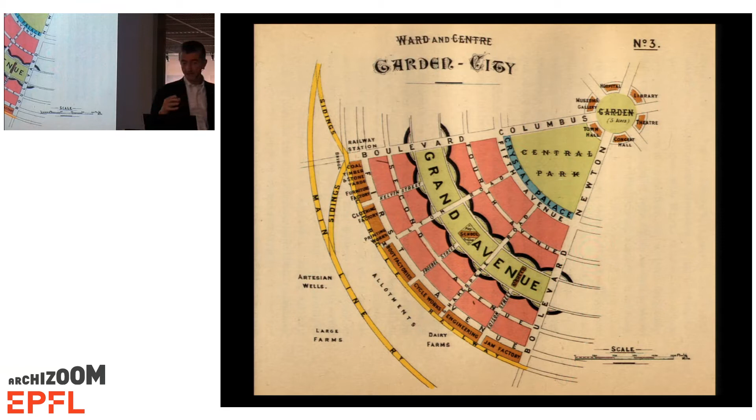The first model for this expansion of the city in the 19th century—one of the first models, there are others of course—is Ebenezer Howard with his garden city, who developed the idea of a cellular growth of a city, a new strategy of urbanization that would take the place of the historical city, which was dirty, non-social, oppressing, and obsolete, and would start a new way of life in the country. You remember the three magnets: town, country, and town-country.

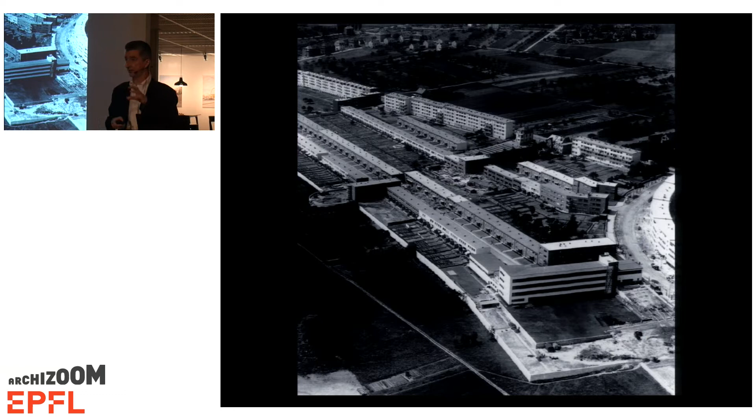From this point on, city extensions happened in such a way. This is an example from Germany, the Römerstadt by Ernst May. These Siedlungen of the 20s took some ideas from the garden city movement. It's quite different because these are not independent cities—they are somehow attached to a central city, in this case Frankfurt. But it's still the idea of having a lot of green and distributing buildings in the green area.

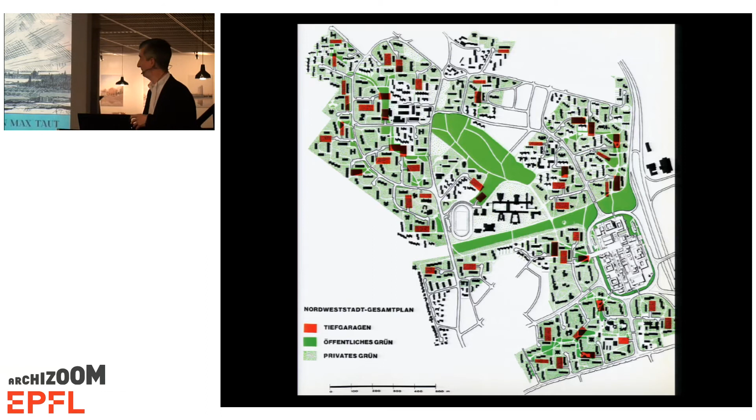This was enhanced, especially in Germany but not only there, after the Second World War by the destruction, which was in fact partially accepted in good spirit because it was called a kind of mechanical opening up—the German wording is even nicer, mechanische Auflockerung. So something that got rid of the overdensity of the 19th century city, and in the ruins or near the ruins of that city, new rural cities could grow, and they then mutated.

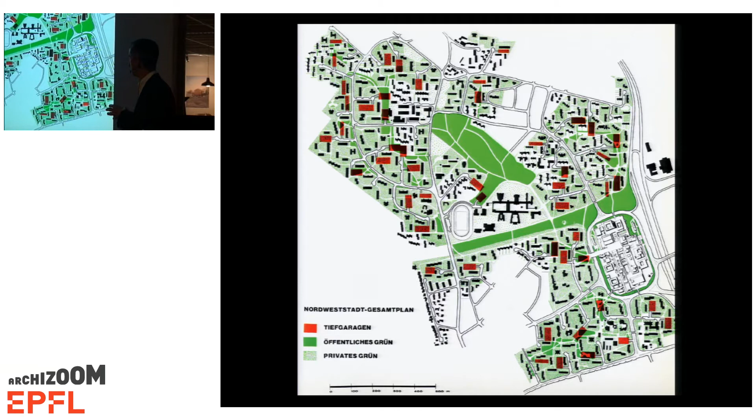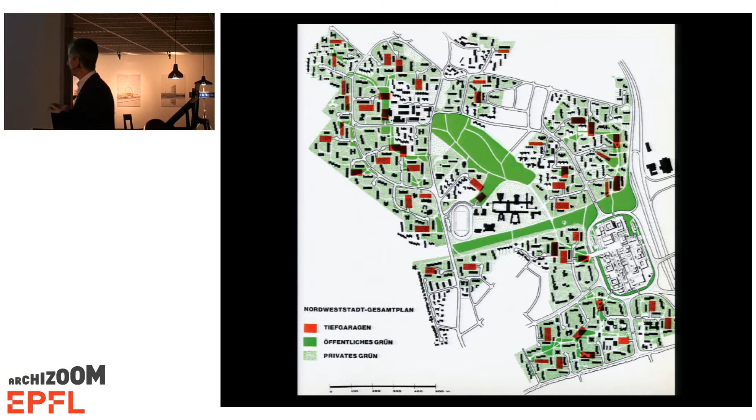I would like to tell you, to sketch another history of modern city extension, starting from almost the same period.

In the 19th century, an engineer named Ildefonso Cerdà first started to do a survey of the city of Barcelona, and then developed this city extension plan. Here you have the old core of Barcelona, and this is his extension plan, a very huge plan for a lot of people, that completely changes the structure of the city and also the type of dwelling.

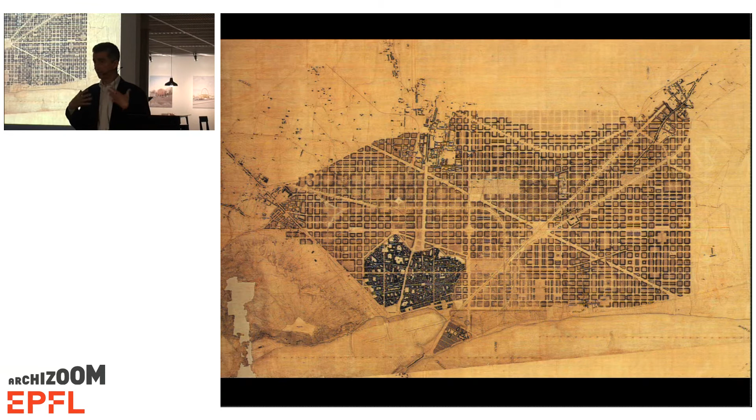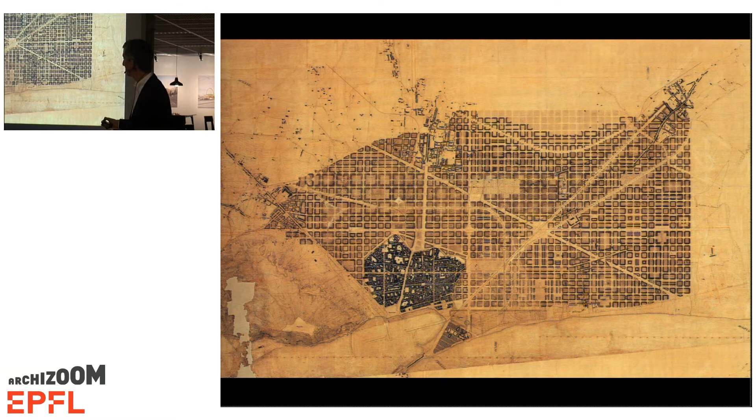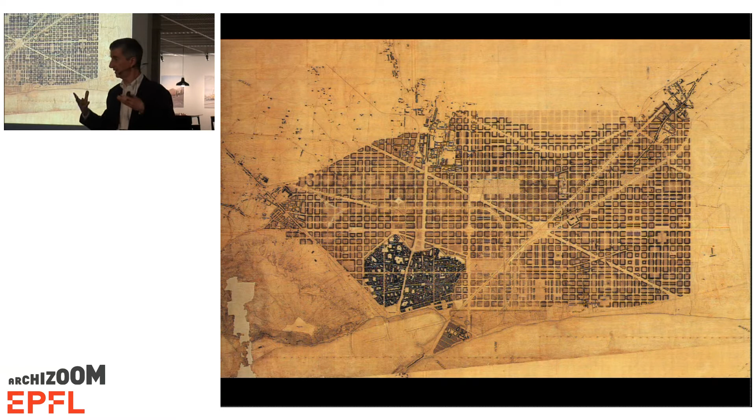And this was an expansion done for exactly the same reasons as Howard's Garden City strategy - to house a lot of new dwellers, and to house them in such a way that they could escape the very tight, dark, unhealthy historical city.

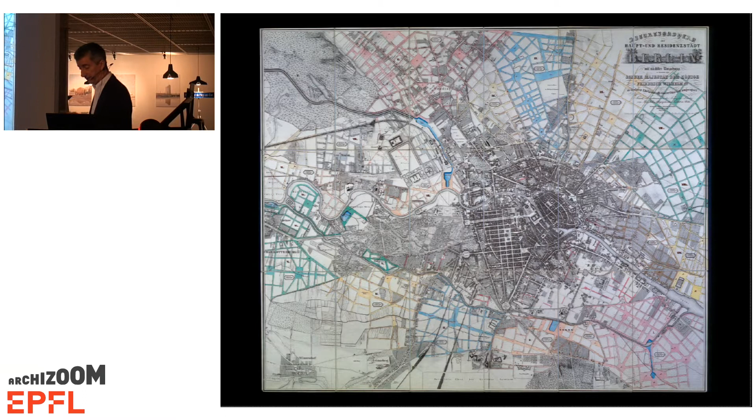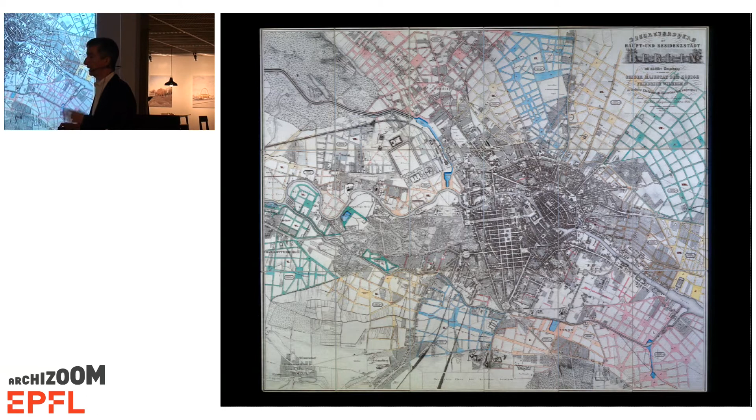Or the plan that James Hobrecht drew up for Berlin, a plan that has been very much criticized. In my view, it's quite an interesting plan, because this was in the middle of the 19th century. This was the built substance of Berlin - it had a little less than 1 million people, and his plan was meant for about 4 million people. So it was a real important extension.

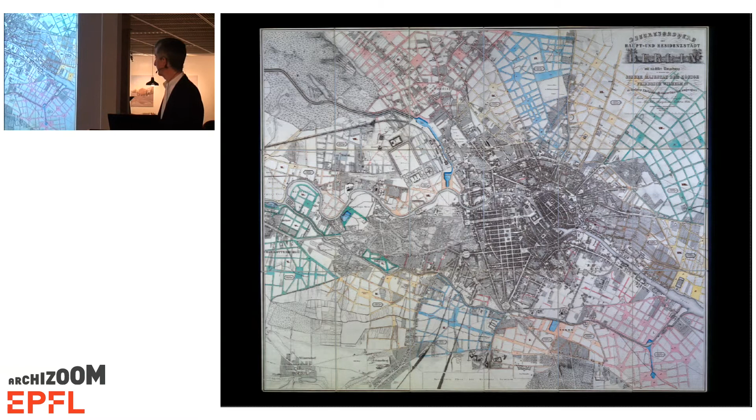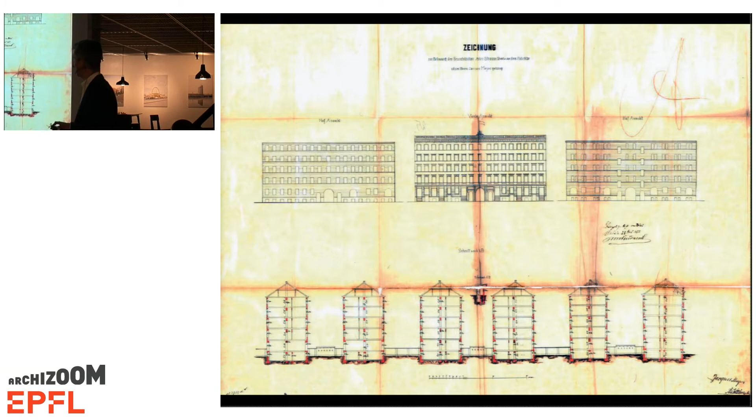He drew up this plan. He has become notoriously famous, or Berlin has become notoriously famous, for the very dense construction with the so-called Mietskasernen, the blocks. This is the most terrifying example that one can find - it's Meyerhof of the 1870s, the 19th century. A quite grim structure of one building after the other, one in the back of the street, with very small courtyards, very poor housing conditions.

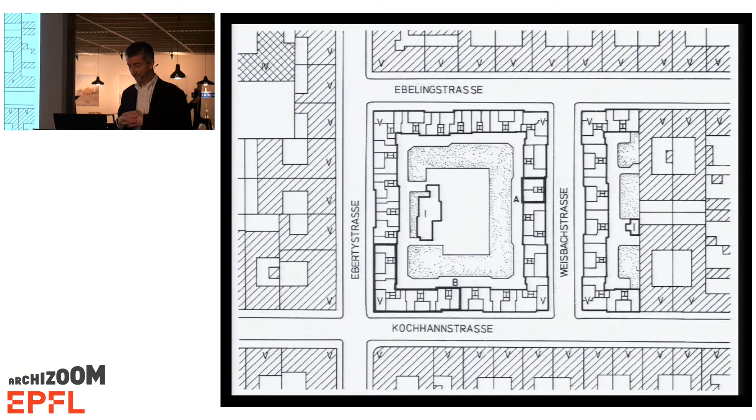But it's not the only way to go about a dense city expansion. Approximately at the same time, Alfred Messel built his block on the Weisbachstraße, which is called a reformed block - that is a block with an open courtyard. The courtyard looked like this, so it was a nice place where children played, as you can see.

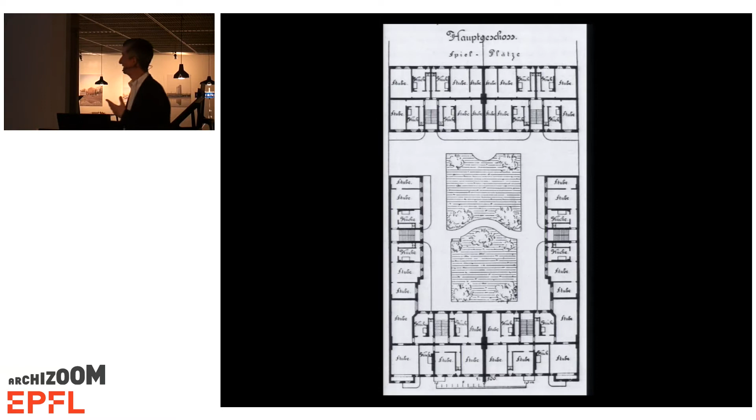And the later blocks that he did, still in Berlin in the 1890s, show a more open structure, very clear design, and quite attractive inner worlds that can also be connected to each other. This is Riehmers Hofgarten, still in Berlin. I show it only to show you the different modulation of this dense city expansion. The question is, which model should we pursue?

And also to understand a little bit more about these two histories and these two models, we have to go back to the main idea of suburbia, or the main idea of the garden city, which has been explained probably in the best book, by a colleague of ours, Robert Bruegmann, who's written a book on suburbia. He comes to a completely different conclusion than I do, but he explains very clearly how, in a way, the idea of suburbia was to have a castle with a park, and once you have a mass society, and once you have also a democratic society, of course you cannot - it's not anymore for just a few people, but it's for a mass society.

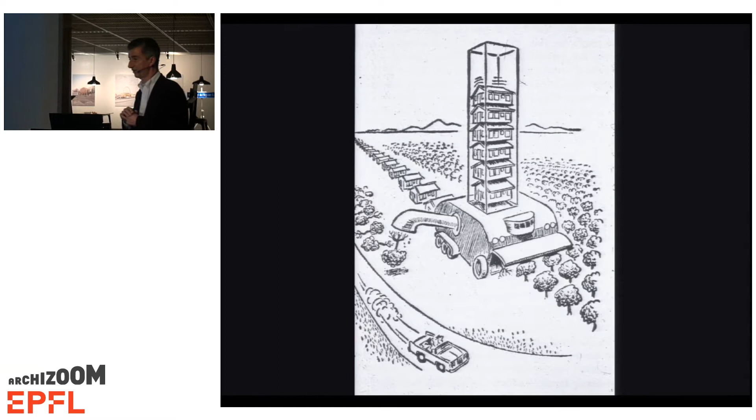This is a cartoon - an interesting cartoon. Well, first of all, I think it's quite witty, but it's a cartoon from the 1940s. It's called 'The Mass Builder Strikes Again,' and obviously it shows the destruction of the landscape by this machine that is eating trees and spitting out houses. The interesting thing is who is using this, because I didn't discover it myself - I rediscovered it, because the man who used it in one of his books is Victor Grün.

We have the name in common, but not much more. Victor Grün was an Austrian immigrant to the United States, and he can, in a way, be defined as the inventor of the shopping mall. And Grün first accepted completely...

He has a really interesting theoretical evolution. First, he completely accepted suburbia, the new developments in the United States, and said the only problem they have is they need a kind of center, and the center is a shopping mall. He invented, in a way, shopping malls that are not only shopping malls, but where you also have other activities.

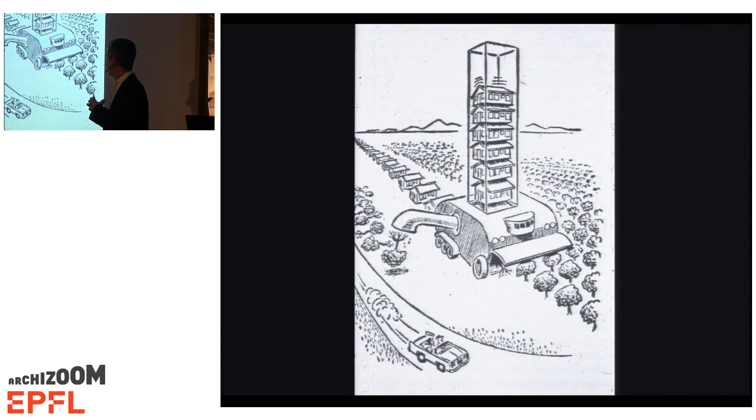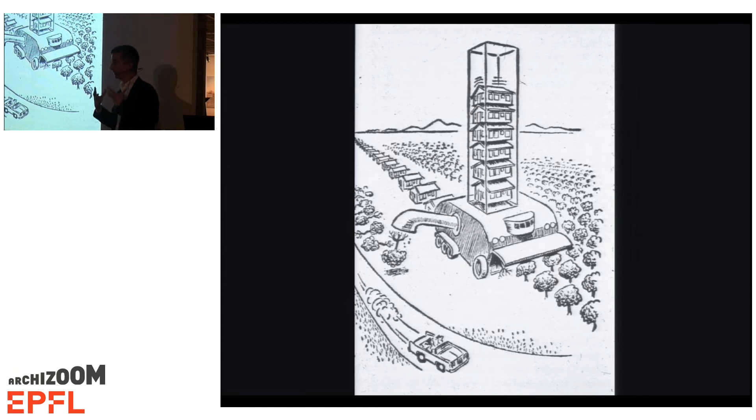You have childcare, a movie theater, and so on. After being extremely successful with these shopping malls, he decided, or understood, or thought that this was a bad development. He then wrote an important article, 'The Sad Story of the Shopping Mall,' and in one of his books where he tries to explain the development of suburbia, he uses this cartoon, which I happily reuse.

These images are not so bad after all, and they are quite attractive. We know a lot of artists and movie people who have used the fascination of these places, starting, on the architectural side, with Robert Venturi.

But we also have to ask ourselves: is this a solution that works for a big population? Is this a solution that is a strategy? Is it a good strategy for the development of a city?

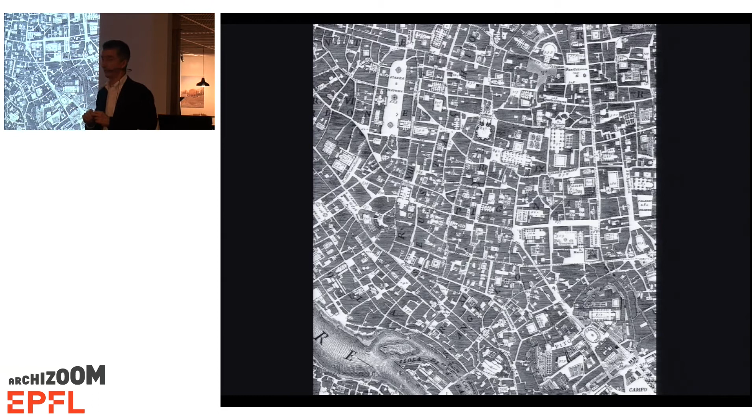And I suspect this can still be—not I suspect, I'm convinced—that this is still a model that, of course, we cannot reproduce, we cannot imitate. It also has a lot of drawbacks: some streets are very narrow, some houses are very high, some places are very dark.

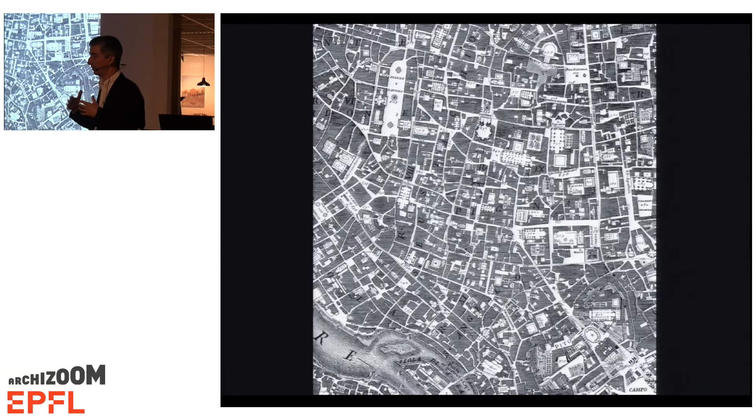But it is, in a way, the basis, or can be the basis, of a future city development. Or, to put it a little more polemically, I think this is a much more progressive city than the periphery images that we've just seen.

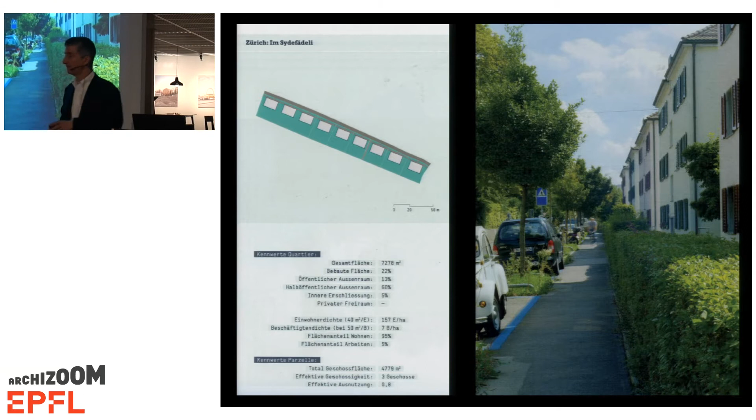We were curious to understand what density is. We were interested in density, but we were curious to understand what density really is. So we looked, this was done with my chair in Zurich, at some typical urban typologies or urban conditions from Swiss cities.

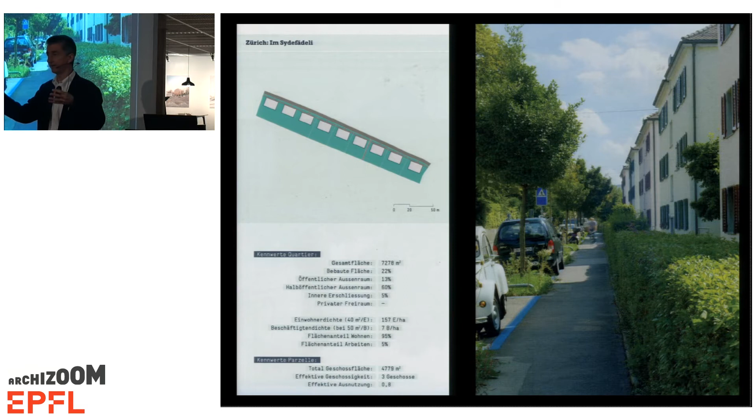We looked at how they are, basically, did a photograph—this is a plan—and we always noted what the density was. I'm talking only about the density of people living there, the residential density. There are many other densities, of course, contacts, workspace, and so on, but this is just to make it simple and comparable. It was just a matter of looking at the density of the residents.

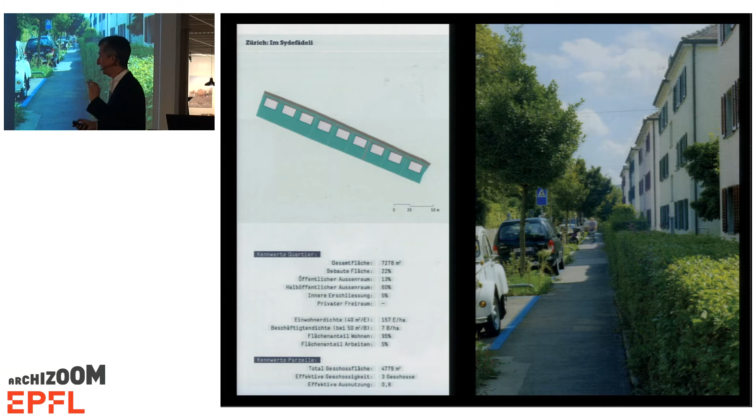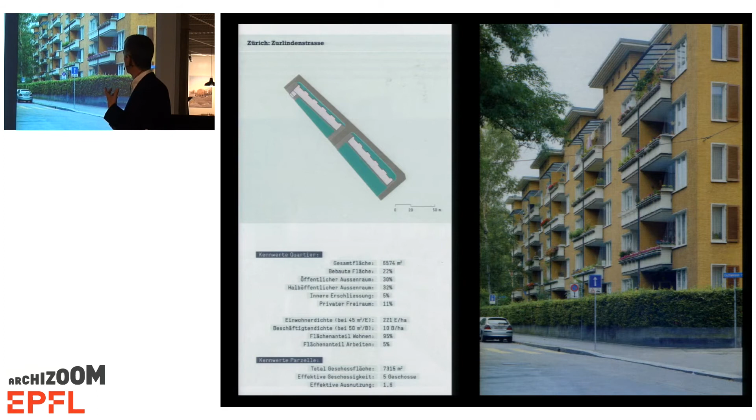And you can see these figures here. This is around 150. It was just to get an idea: this is a little bit more, this is 200, this is a slab.

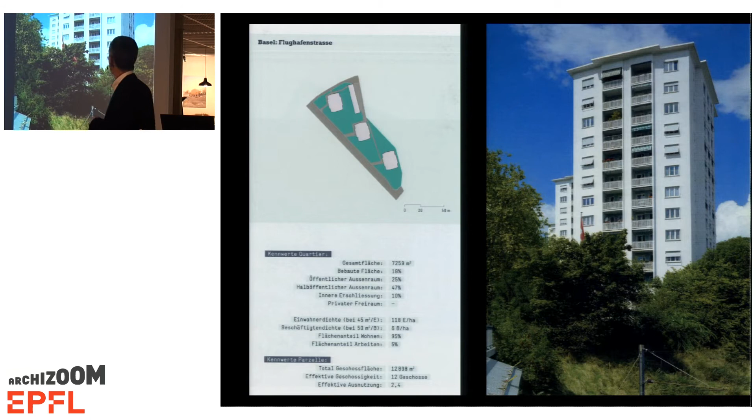This is a new, more modern development. It reaches 280. These are towers in Basel that are not very high, but especially they have big spaces between each other, so they are lower, 118.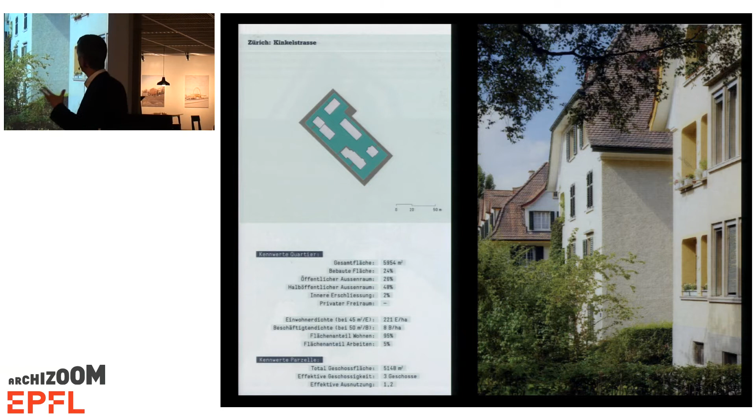This is a nice environment in Zurich with single standing houses with several apartments in one house. It's about 200. This is about the same, a little bit more than 200. This goes higher, 260, a block in Zurich, but rather low houses.

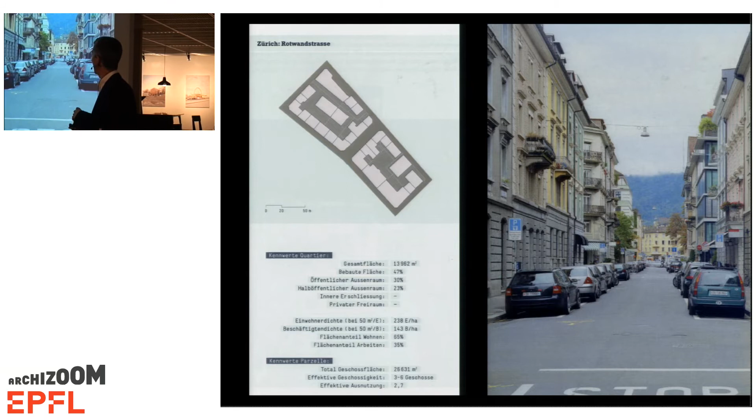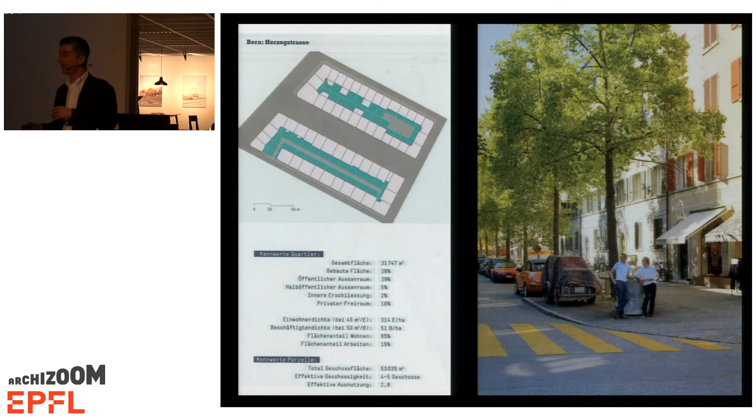This is a block with higher houses. It comes to 230. This is again a block, a little bit denser. It comes to 314. It was just for us a way to understand what density is about.

How, what can you reach with different typologies, and of course what kind of qualities you attain on the streets, in the courtyards, around the houses. It was, I must say, quite surprising, because there were some quarters like this one that did not give us an idea of density, of being oppressive, where we found out that quite a number of people were able to live in this space.

Why this interest in density? To make it short, there's a few issues why I think density is something we cannot avoid. Putting houses together, putting people together, enhances communication, and it's also good for a mixture of function, when you don't have only residential but also workspaces and jobs.

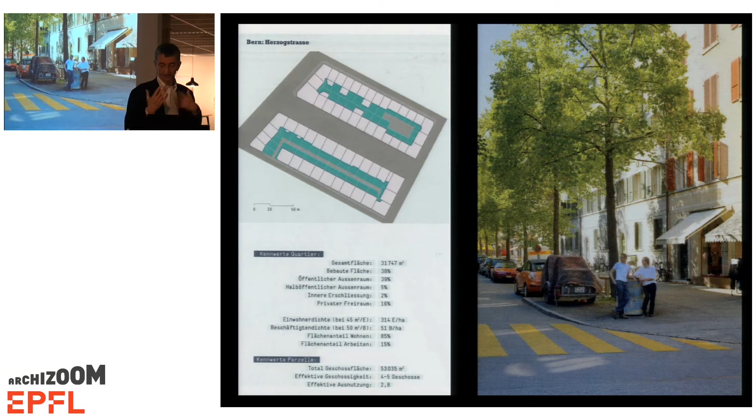And then I think what is really very important is the ecological issue. I think we just cannot afford to consume so much landscape as we still are consuming. Switzerland is a very positive example, but this terrifying figure of 1 square meter per second is what we are consuming in Switzerland in terms of landscape, and I think it's quite unacceptable. So these are, again very briefly—maybe we can discuss it more afterwards—why we have such an interest in density. There are also cultural aspects, but we will talk about that maybe later.

And finally, I would like to show you one intervention that we did in the periphery, where we tried to show that it's possible to build a dense city also in the periphery.

To make it clear, we also did this analysis of different situations because we do not believe there is one dense typology of a dense city. We don't believe it's row houses or blocks or so on. We think there is a big range of possibilities, and in fact we think that the history of the city offers a big choice, or big set of inspiration, of how to find different solutions to this question.

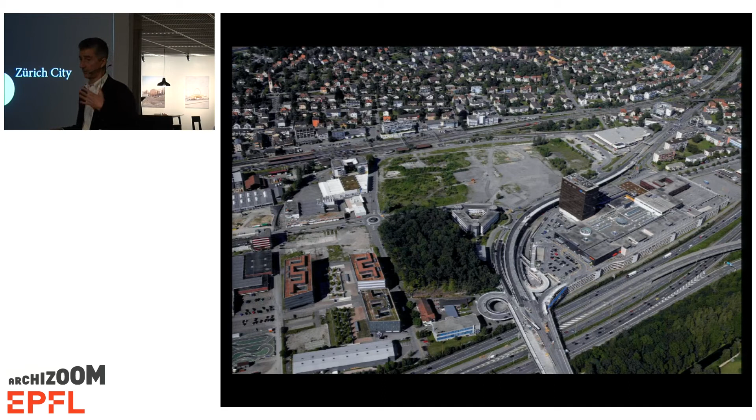The project that I would like to show you, again briefly, is situated here. If you have the city here and the airport, it's in this axis of the airport. So it's a place that is developing very fast in Zurich. It's the so-called Glattal. Richti is situated about here, but it's not Zurich anymore—it's outside the city. And if you look at the site as it was before we started the project...

It's really suburbia at its best. This is Wallisellen, and Wallisellen is a village—they call themselves a village, they speak of our village, Wallisellen—but it's of course very near Zurich. So you have all these small houses here. Here you have a new development, mostly office buildings. This is a shopping mall, the Glattzentrum. All this here you see is the parking garage.

It's quite large, and they say it's the most successful shopping center of Europe. I couldn't check it, but it seems to work. Here you have a street. Here you have the station. Here you have the highway. So it's really suburbia, and a lot at our disposal was this one.

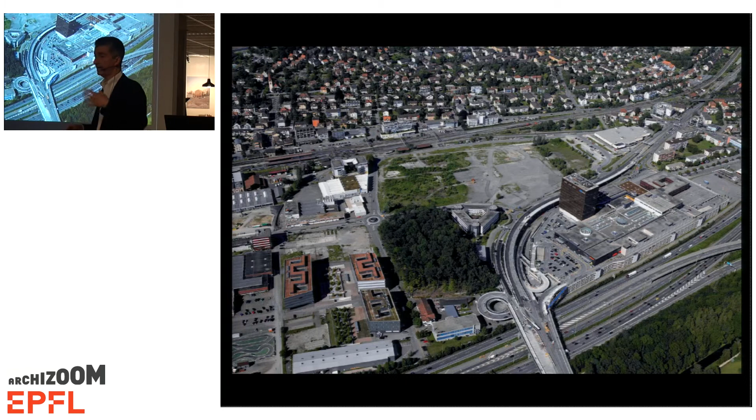It was an industrial site, dismissed, completely cleaned up, and empty. It has stayed empty for a long time. There was a competition. The requirements were interesting and I think also intelligent.

It was about 50-50 residential and workspaces. Actually, quite a number of workspaces were required. To give you a rough idea, the site is about 70,000 square meters, or 7 hectares, and the requirement was to house about 1,000 people here and provide about the same number, a little bit more, of workspaces—just very roughly. A park was also part of the program.

What we tried to do was—well, the first thing we said is we cannot do the park here because it's too small. We prefer to have the park elsewhere, also because it's too exposed in all this mess of streets.

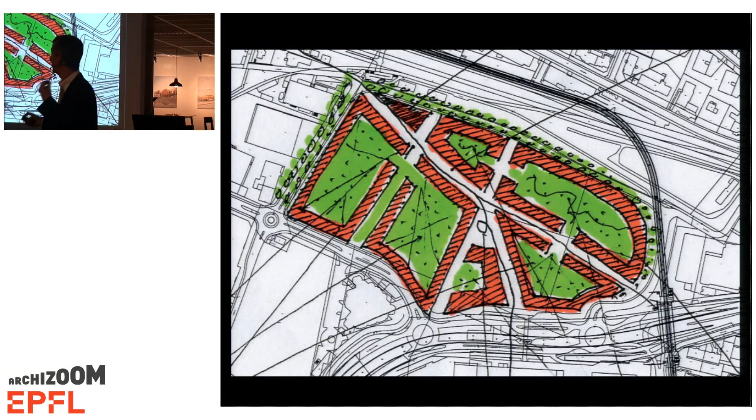We want the park to be inside the buildings, or inside the quarter. And we want to do a kind of autonomous quarter linked to the context, but with its own square, with its own streets, with its own structure.

This was the very first sketch. This is the competition drawing. It's a collage, actually. As you can see, the park is not our design. It's by Lenné or by Le Nôtre, and also the plans, the housing plans. We did really a collage by Kay Fisker and Bruno Taut. And it was about an urban idea.

The urban idea is basically to have a connection between the station that is here. This I forgot to tell you because it was not in the first image. This is the so-called Glattalbahn, a tramway connecting Zurich with this periphery, and it has a station here. So we decided to have the street.

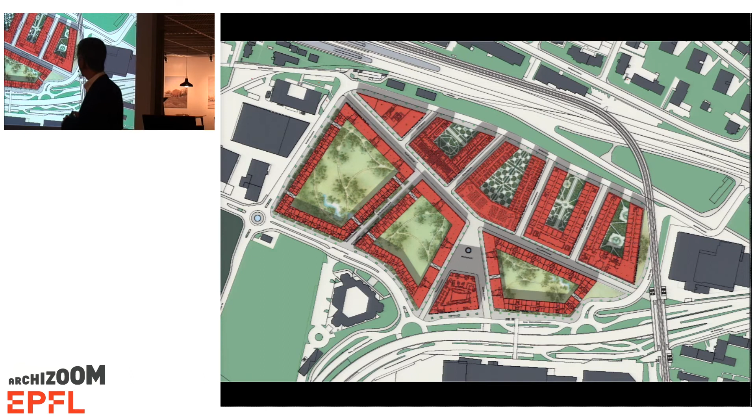It's getting paler and paler, a street connecting the two things. In the middle, a square, and then another connection to this Glattzentrum, to this shopping mall, which is very, very much populated.

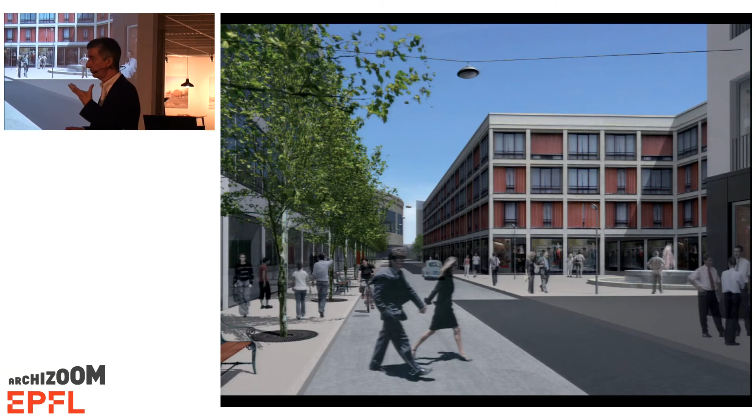What we tried to do, or what was our interest, was to create really two different worlds: a very urban world outside in the public domain - this is our first idea of the square - and a very private, green, bucolic, park-natural atmosphere in these big courtyards.

Again, it is not a new idea. It was done in the 19th century, in the 20th century. We try to interpret it in a little bit different way.

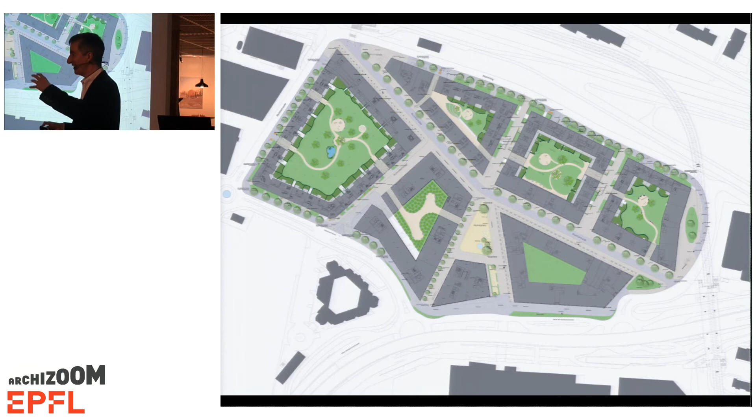This is the final plan. It changed quite a lot. As you can see, we closed the blocks towards the railway, and through the same design, the same language of landscaping, we really tried to connect these courtyards with each other, so that you should have a feeling, hopefully, that it is a kind of continuous park, only fragmented in these different buildings.

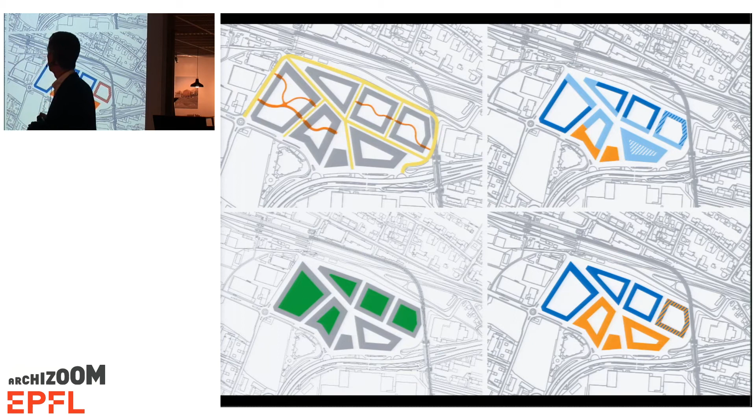This is already quite detailed. You can see the blocks, and you can see also the first design of the public spaces. Briefly, the system of the traffic: yellow is car traffic, orange is only pedestrian, so it's a connection between the courtyards.

These are the courtyards. We couldn't do this because the developer - it's a private development, it's a speculation - needed this area for a big shop, for shops.

This is a sketch of the uses. So this blue here is residential, and this orange is offices. We decided to divide the blocks so that they would be basically monofunctional.

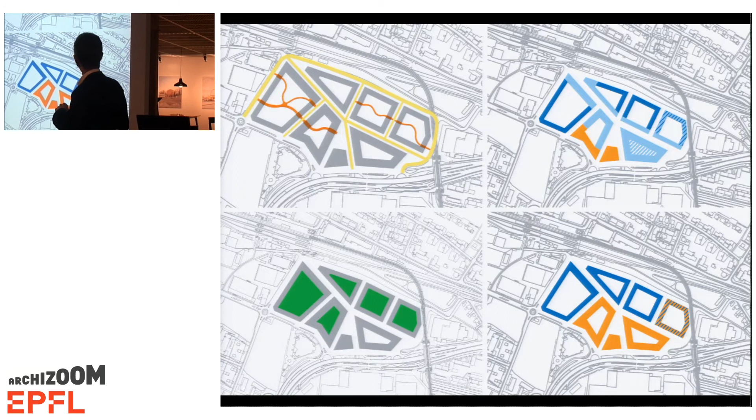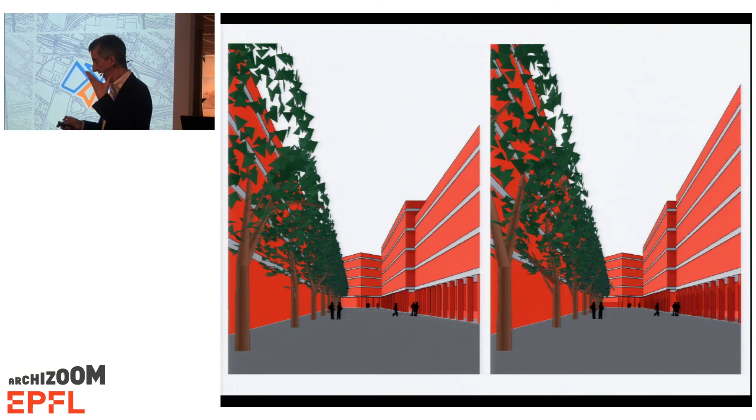This is a mixed block, and what you see here are the uses on the ground floor, and you can see the light blue are shops. So the ground floors should be activated through shops, restaurants, cafes, and so on.

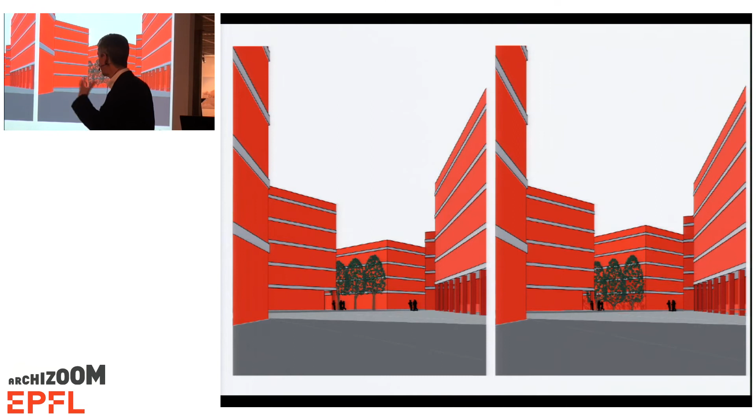Since we were interested in density, we tried to find out through 3D models how high the buildings could be. You can see here an experiment with 3 floors, an experiment with 4 floors, and we really wanted to try to understand how the spaces would look like, and hopefully also feel. So these were the first experiments to establish the height of the building, if you want, the density, as a basis then for the change of the planning rules for this area, which of course were completely different.

And then we started designing the public spaces, or to be more precise, the plot, or the single blocks, were divided under different architects, because we thought it was too large to do it all ourselves, and also to do it with one handwriting. And we reserved for us, immodestly, the largest residential block. The largest because I wanted the largest, and the residential because I think it's interesting, or it interested me more.

And then we started designing the public spaces, because we were really interested mostly in the public spaces. So the main square here, and it was really the first thing that was designed and established.

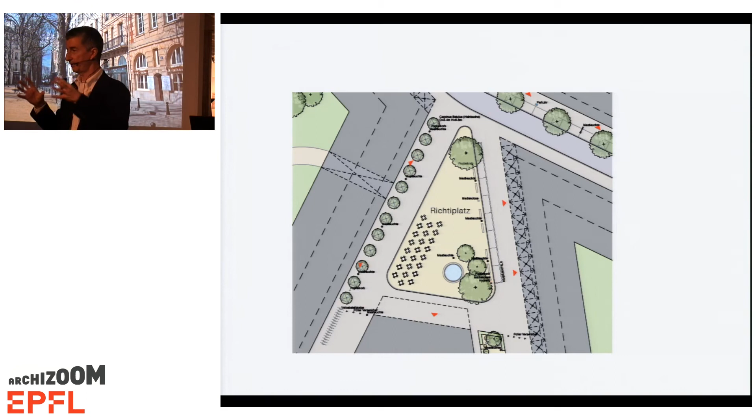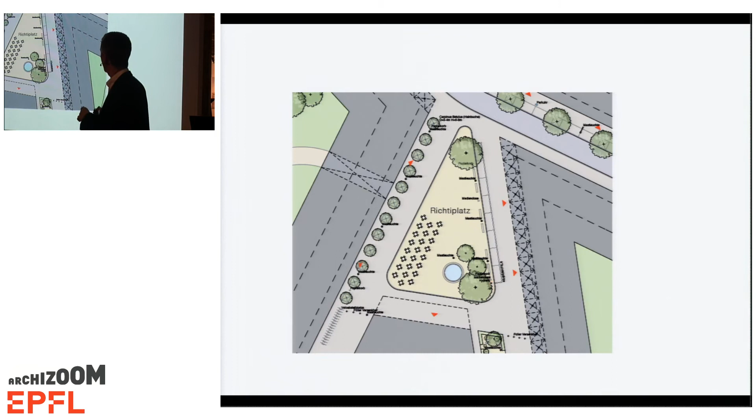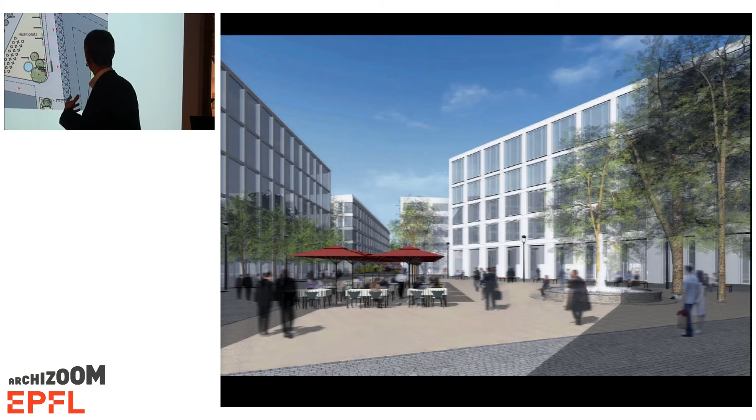This is then our design of the main square, with a few trees. We were interested in a place that really can be used, with a fountain, and this is our idea of how it should look like once it's finished.

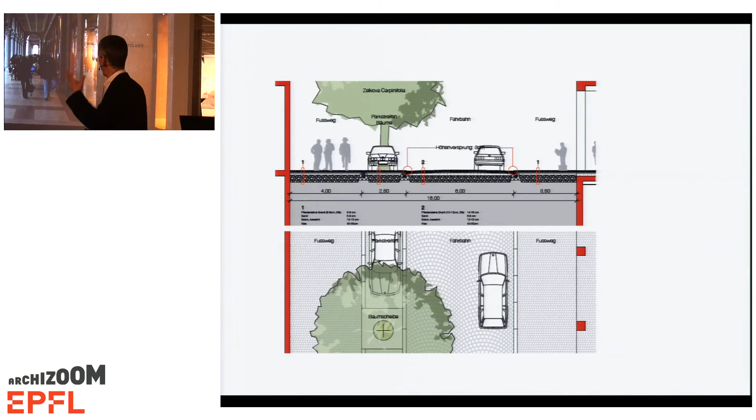Then we designed the main streets, the so-called Richti Arcade. It had to have shops. We wanted an arcade, so we looked at many arcades in Turin, for instance, just to understand the proportions and how it works. This is the section of the street that we established. The arcade here is a bit smaller than the one in Turin, but it's still 4 meters wide, so we think it's okay. Asymmetrically, it has a row of big trees.

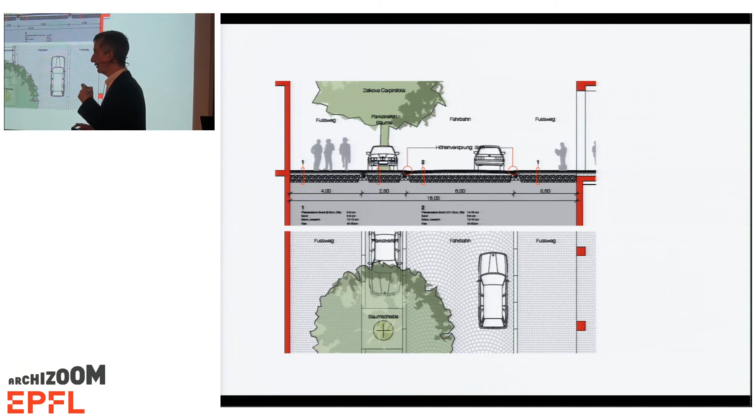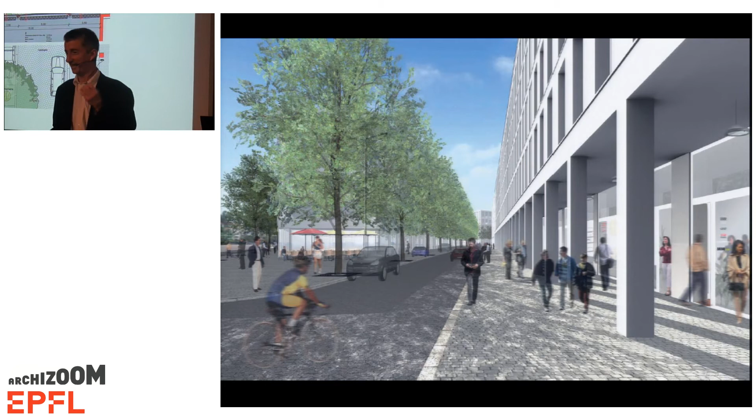This is how the cars will go and park. You may be bored by this detailing of materials and colors and so on, but we think it's absolutely crucial. We think that having a good curbstone is absolutely important for good urban design. It's not all in urban design, but you need to detail it down to the curbstone.

This is how we envisaged it again at the very beginning. And then we had a second typology of streets, the so-called minor streets, that were not meant for through traffic, only for people living there—the Anliegerstrassen—and those are these three streets here.

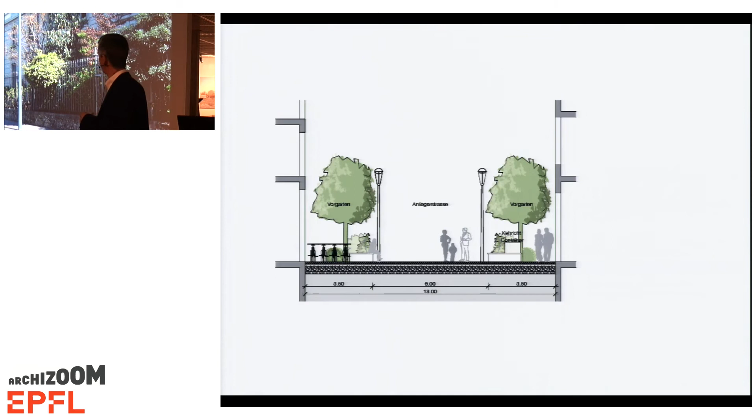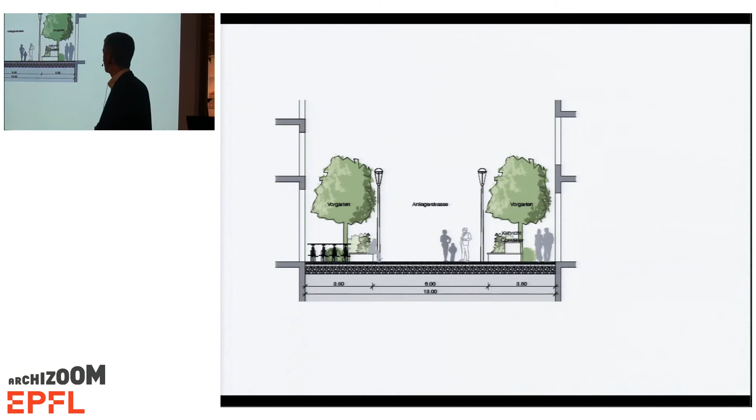There we wanted to have gardens towards the streets. This is an example from where I live in Milan, so it was not difficult to find it. This is a section, again much more modest, of the streets. They don't have sidewalks—we don't need sidewalks there. We have this garden where you can put the bikes. These are the lamps that are, again, different from the lamps where you have real traffic.

And this is how the whole thing could work. To finish, I'll show you quickly the progress we made with our block, which we considered a kind of model of how these residential blocks could work.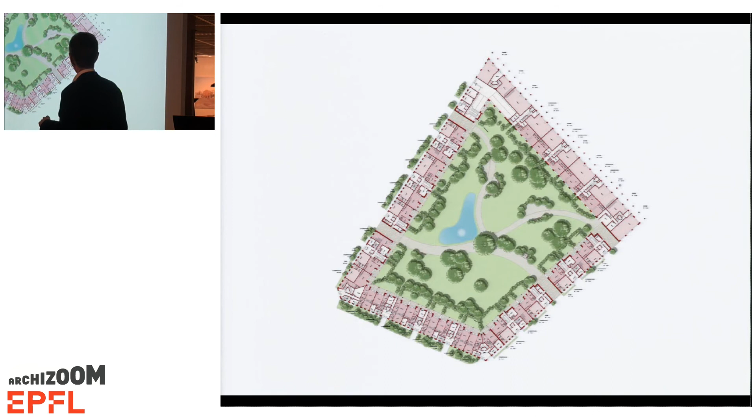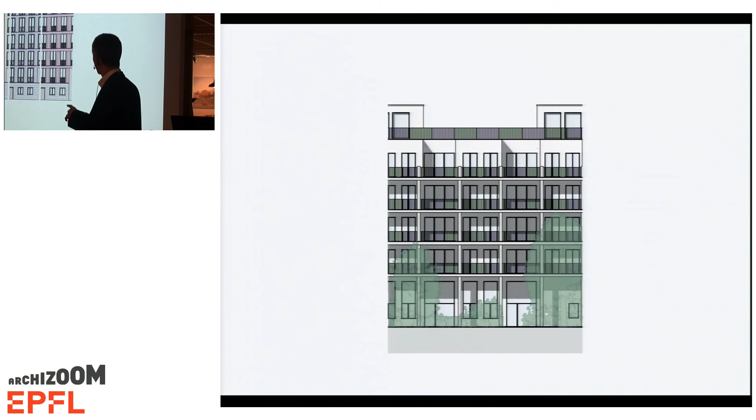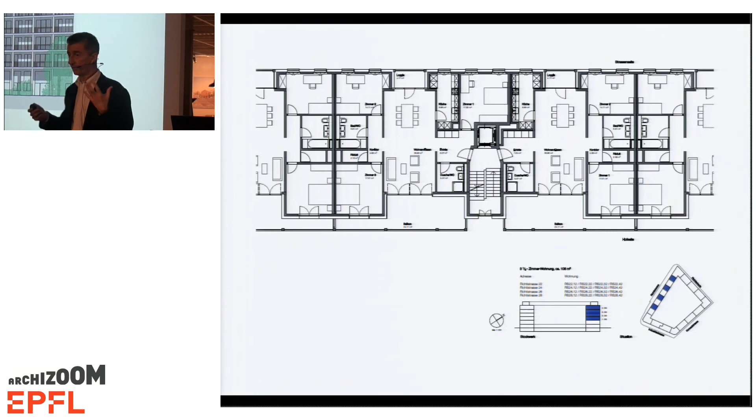It's rather large, about 130 meters in length, so it's really a big garden in the middle. These are studies of the street facade, the urban facade, that we wanted to be closed and urban. And this is the facade towards the courtyard, where the apartments open up with loggias and balconies and so on.

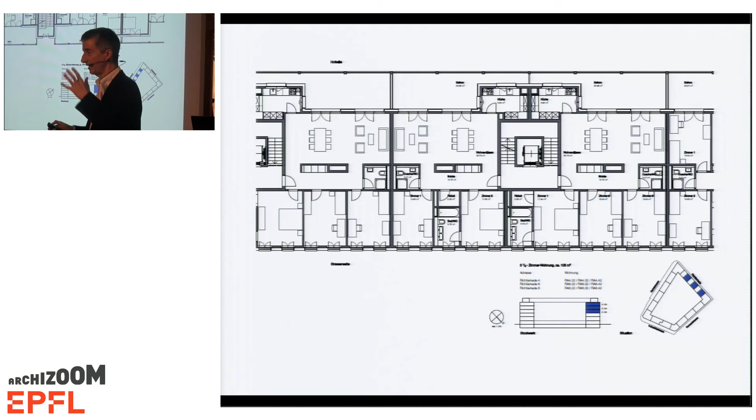This is a basic plan. I show it only because we were really interested in having one room, the living room, going from one side to the other, so that in almost every apartment—though not every one—you have both the urban side of the environment and the more quiet, private side.

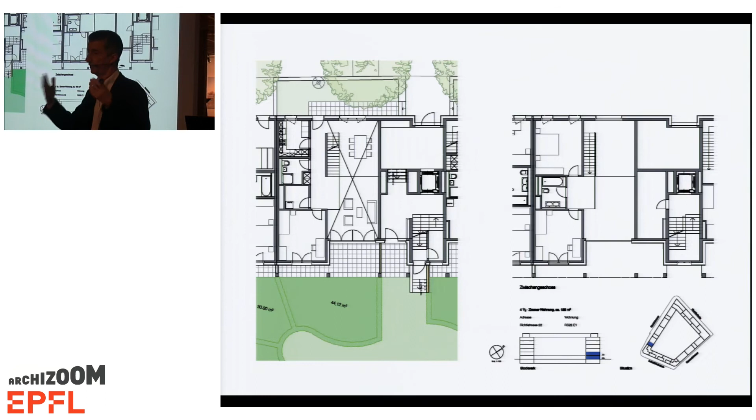These are the apartments where we didn't manage to do it, but we have very large balconies here, and it's very nice because it's on the south side. These are the maisonettes—there was always this problem of how you put apartments on the ground floor, so we have a Hochparterre, and on the ground floor we have only maisonettes.

And this is the courtyard, and with this I would like to finish, because I wanted to show you the courtyard too—you see that nature, which became so important in the 19th century and which I consider an important asset for the quality of life, can be saved even in projects that are urban, dense, and really city.

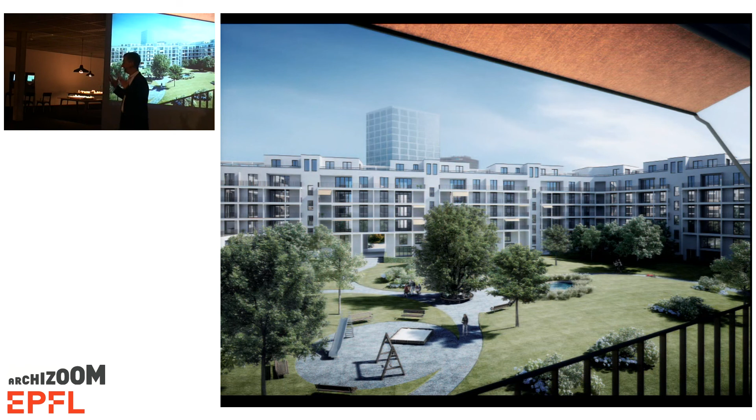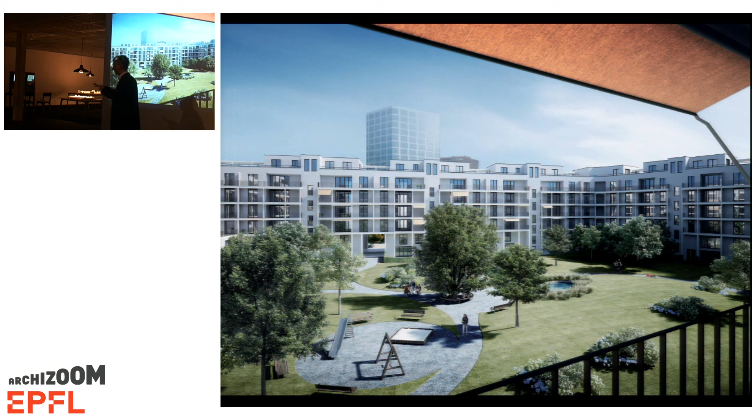Et ça, je trouve complètement faux, parce que Schwamendingen n'est pas mon cup of tea. Je ne suis pas amoureux de Schwamendingen, je n'habite pas à Schwamendingen, et j'espère que je n'habiterai jamais à Schwamendingen. Mais franchement, je l'ai regardé, parce qu'on nous demandait une proposition pour la densifier. Et j'ai conclu qu'il ne faut pas la densifier, parce qu'elle a son charme, c'est la ville-jardin, c'est les espaces verts. Il faut, si on change ça, soit la garder, soit la détruire et construire une chose complètement nouvelle. Mais une chose à moitié serait, selon moi, une grande erreur.

Pour répondre maintenant à votre question, je pense que dans la périphérie, il y a des situations qu'il faut garder avec une densité basse, parce qu'elles sont comme ça. S'ils ont une logique, s'ils ont aussi des qualités, il faut les garder comme ça. S'ils n'ont pas cette logique, s'ils ne sont pas des vrais projets, je pense que vite ou lentement, ça dépend de la situation économique et politique, il faut les substituer, c'est-à-dire il faut les détruire. Je pense qu'il faut avoir le courage de dire qu'il y a des parties des villes, de la périphérie, qui ne sont pas bien, qu'il faut substituer.

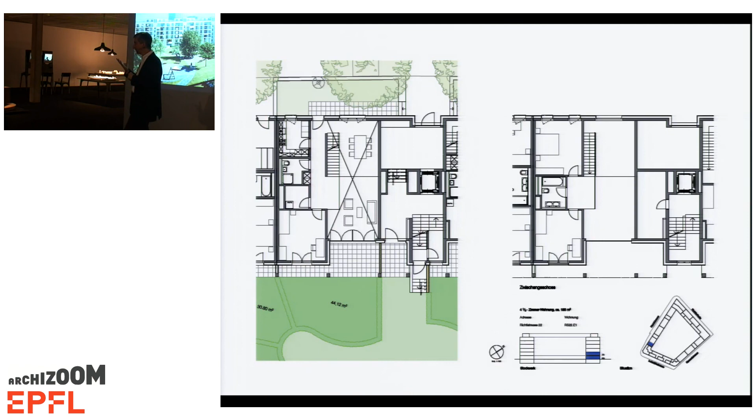Tu sais, je n'ai pas peur de la différence. Je pense que les différences sont bien, et je pense aussi que les conflits entre notre projet et ce que peut-être fait le groupe Krokodil sont positifs. Ma préoccupation, ce sont les infrastructures qui divisent ce morceau. Pour le dire d'une autre façon, c'est la connexion qu'on crée entre ces patchworks, ces morceaux de ville. Mais je dois dire que je suis aussi optimiste, parce que par exemple, quand on a commencé, peut-être je peux vous montrer ça très vite.

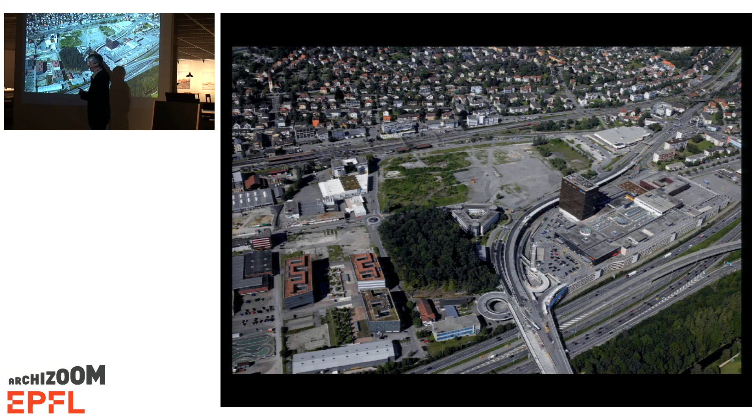Quand on a commencé ce projet, la situation était vraiment dramatique. Bon, elle est toujours dramatique. Mais il y avait cette Winterthurer Straße, et on nous a dit que ça allait devenir encore plus important, et qu'il fallait faire un pont, une passerelle entre le Glattzentrum, les Richti et notre quartier, mais une passerelle haute, parce que c'est un viaduc. Il faut faire une passerelle, parce qu'autrement les gens ne passeront pas la rue, c'est impossible, parce qu'il y a beaucoup de trafic. J'étais là, je n'ai pas vu le trafic.

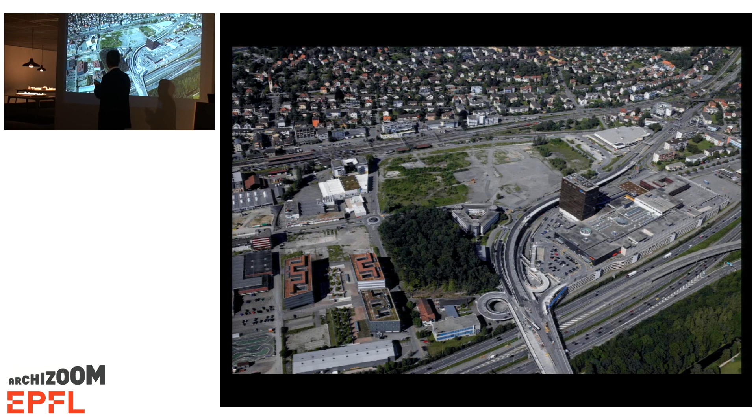Et après, il y a eu beaucoup de discussions. Et maintenant, c'est clair qu'ici, il y a très peu de trafic. Il ne faut pas la passerelle. On peut redessiner ce morceau de rue ici pour en faire une connexion à plat entre le Glatt et notre quartier. Et peut-être qu'on peut aussi éliminer ces viaducs. Ce n'est pas trop clair, mais on peut les éliminer.

Tu sais, il y a une phrase très jolie. Ce n'est pas de Goethe, c'est de Dorothy Sayers, je pense que c'est Wimsey qui dit: les faits sont comme les vaches, si on les regarde dans les yeux pour longtemps, ils s'en vont. Et c'est un peu comme ça. Il y a ces faits qui sont des faits accomplis, ils ne peuvent pas changer, ce sont les conditions du projet, et après elles changent.

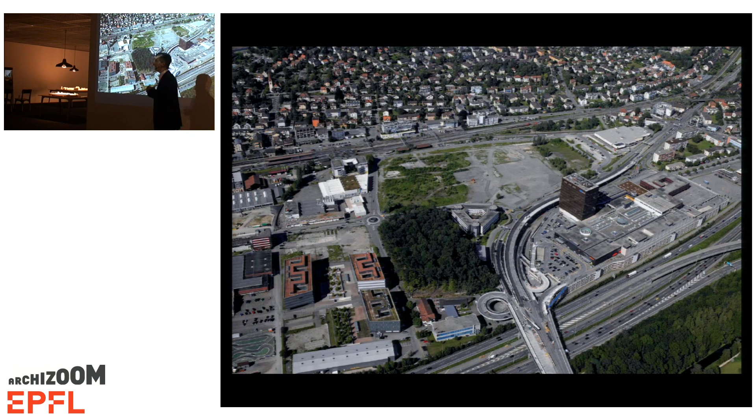Et j'espère, je suis optimiste là-dessus, vraiment, j'espère qu'il y aura la possibilité de lier. Parce qu'une fois que ça se développe, si on développe aussi ça, on va créer des liens entre ces mondes, qui restent des mondes différents, je suis sûr, mais j'espère qu'ils vont être liés l'un avec l'autre. C'est très important. Si on ne réussit pas ça, alors on a un problème.